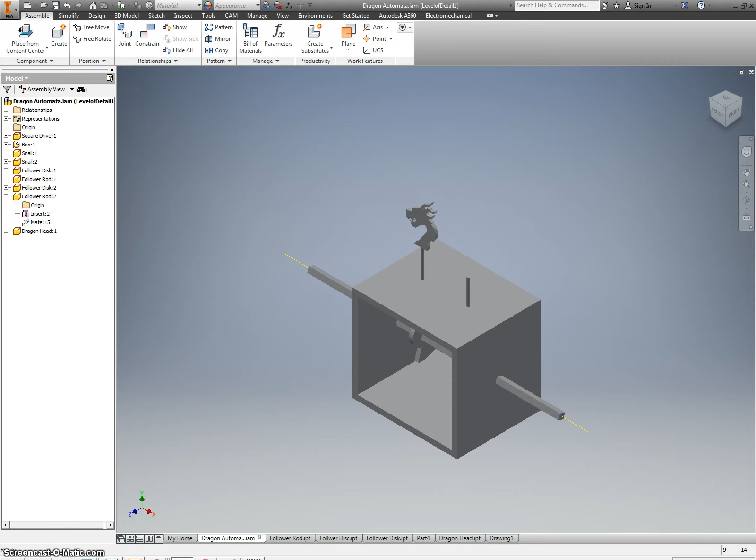Now that you have your cams and your axle in here, your follower rods, and something to go up on top of it to show movement, it's time to do the most important part of the project, worth the most points. Go up to New. We have to make drawings. We have to be able to show other people how to do the stuff you did.

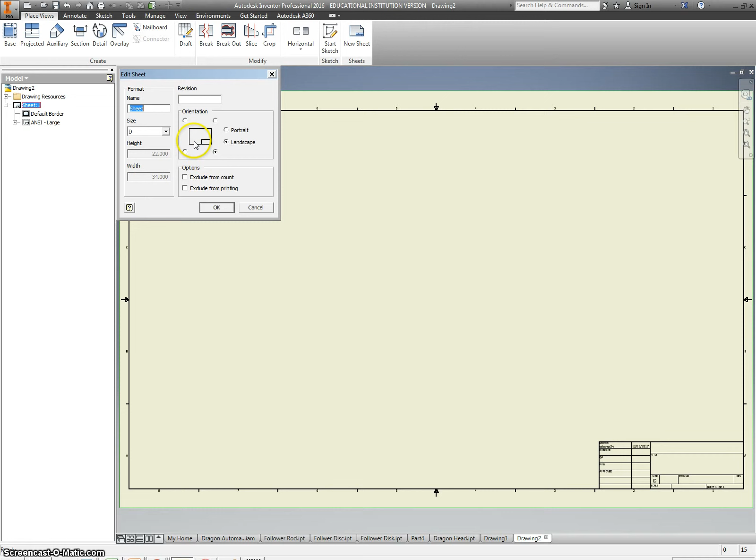First off, this paper's the wrong size. Right-click Sheet 1, go down to Edit Sheet, change your size to A, and say OK. Now the sheet is the correct size, but this title block is wrong. So right-click and delete ANSI large. Hit the plus sign next to Drawing Resources, go to Title Blocks, ANSI A, double-click. Okay, now this is the right size paper with the right size title block.

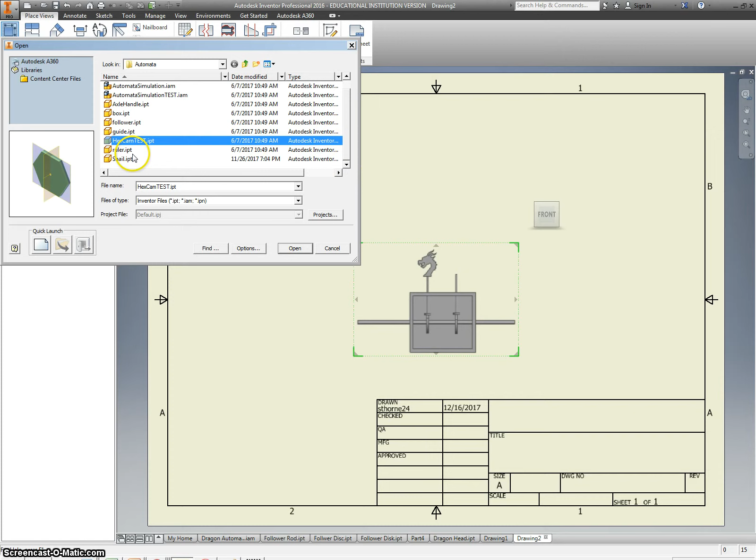We're going to go to Base, and let's search for each one of your parts that we used in here. Some of mine are in different folders, so you'll have to forgive me while I figure out where things go.

When you're dimensioning, you want your front view to be in the bottom left corner, and the other views are going to be -- if it's a uniform thickness, like all of these parts are that we cut out with the laser, you only need 2 views. You want this bottom left corner to have the most detail.

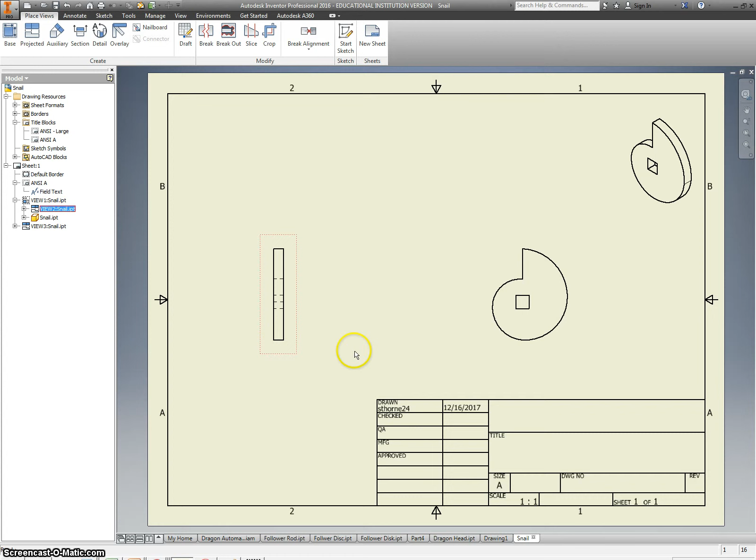So for example, this is wrong. This is the front view, this is the side view, this is the one that should be in this corner here. You want these kind of close together, and then we're going to go to Annotate Dimension, and we're going to start putting numbers on this.

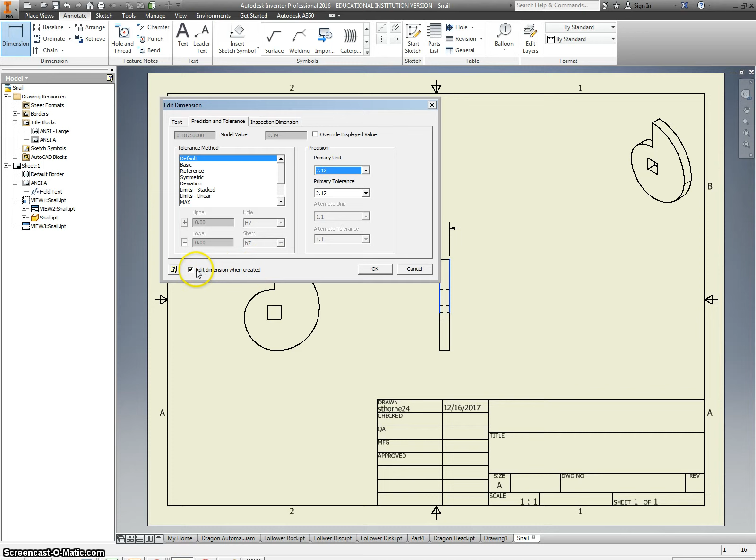Now notice this is 0.1875, but it's only showing 0.19. That's because it only goes out to 2 primary units. Now I could go through and change this each and every single time, or I could uncheck this box, say OK, and then right-click on this dimension, go to Edit Dimension Style, and for every part that I go to dimension in this whole project, I'm going to change my precision to 4. Say Done, and Save Edits, and there's the 0.1875.

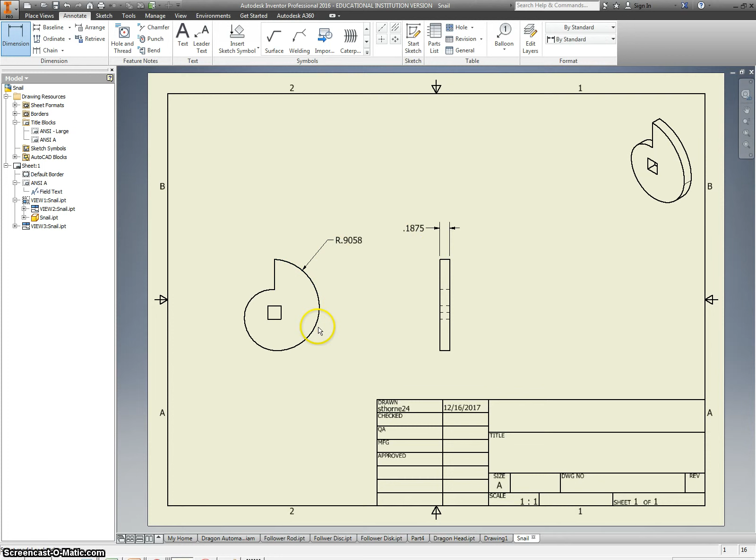This one is going to have different radii for different parts of it. Did you notice how I clicked that little green button and nothing happened? That's because I clicked a center point and it's expecting me to click some other point, which I don't really want to do. So if you hit D on your keyboard, that stands for dimension, and that will let you go and start over.

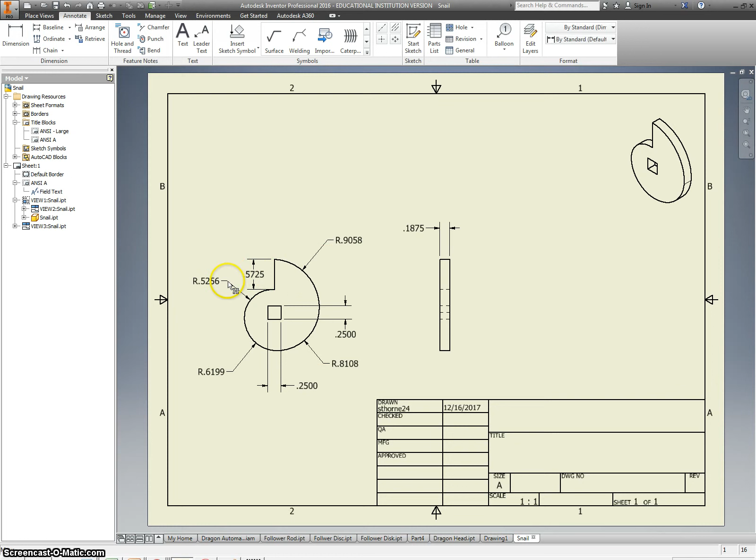Okay, we want to make sure we don't cross any lines, and that we stay inside our page borders. We don't want to go through our title block. We want most of our dimensions to be between these two. But with radii, it's okay if it's off.

We can put in, if I click this, centerline bisector. So if I click these 2 lines, it'll make a line in between. Click these 2 lines, it'll make a line in between. And we can also show that the distance from that point there to that point there is going to be some distance, 1.02. Looks like I'm going to have to go through another dimension to put this one down.

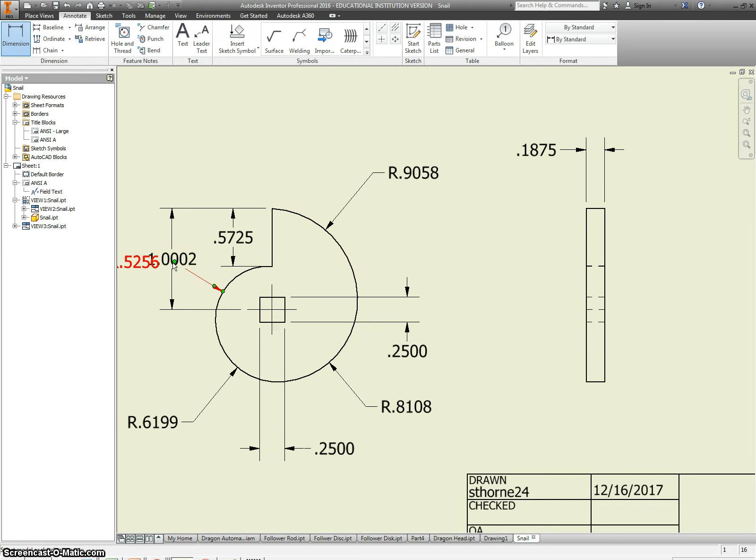So I'm just going to grab this one and move it down just a little bit. Okay, so this looks like a good way to dimension my snail cam. I'm going to double click this one, make it shaded, and keep on going.

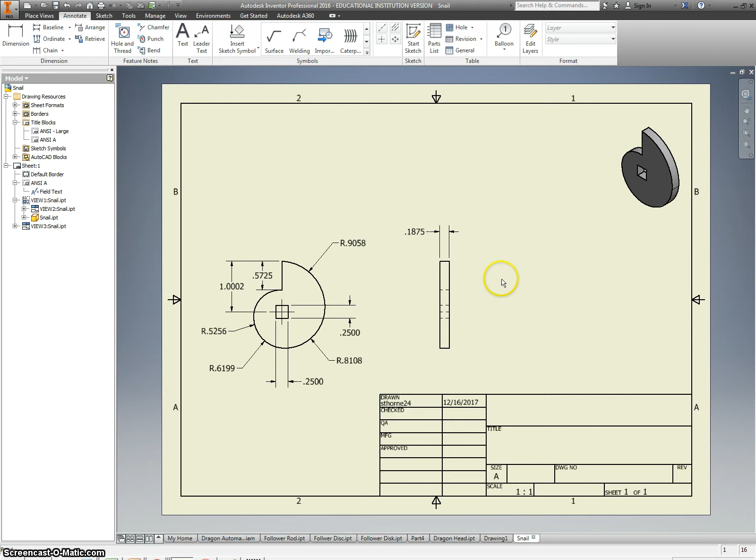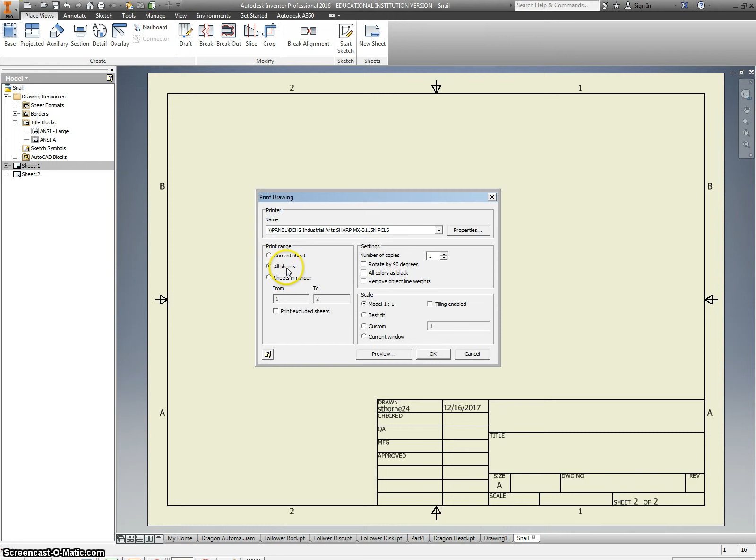Now to add a new page on this, I have to go to Place Views, New Sheet. Don't start a whole new drawing file every single time. This has all your Sheet 1, this is all your Sheet 2, and when you finish, you go up to File, Print, and if you have the right printer selected, Industrial Arts, you can click All Sheets, and this will print everything that you've done. So make sure you have Industrial Arts selected.

It's also good to go into Properties and check Two-Sided. So that's when you're ready to print.

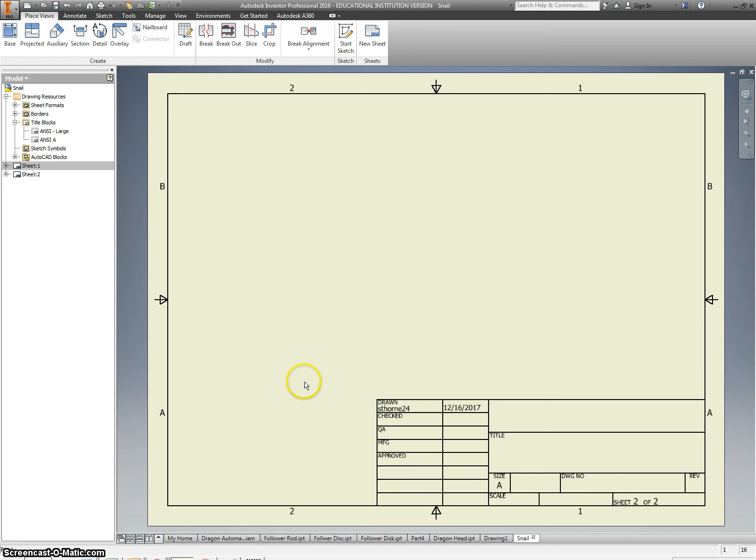Okay, each part that you made for this object, for this automata project, needs to have its own sheet. The only exceptions are going to be like the dragon head, which I can still place on here, go to Base, and I would grab my dragon head, and I would still give this a good size, so it's taking up a little bit more of the paper.

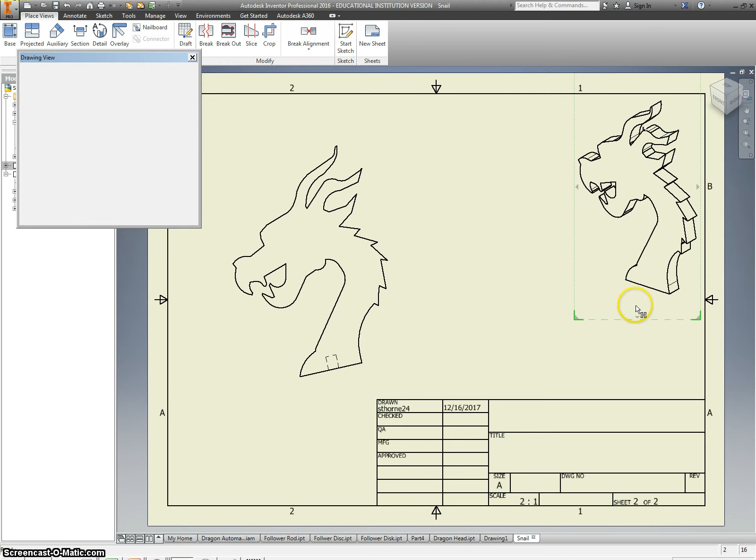Drop it over there, make this guy shaded. This might be one that I want to show projected from this. Looks like projected is not going to give me what I want with that hole diameter.

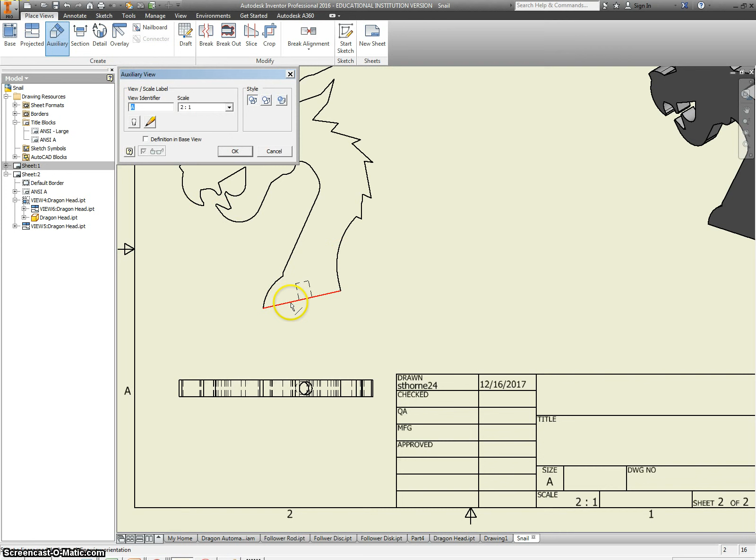Maybe I can do an auxiliary. So if things are at an angle, we can say, hey, that angle, I want to see this lined up with it, which is exactly what I wanted, so that's good. Just click and delete that one. Scroll this down just a little. This one can go up just a little.

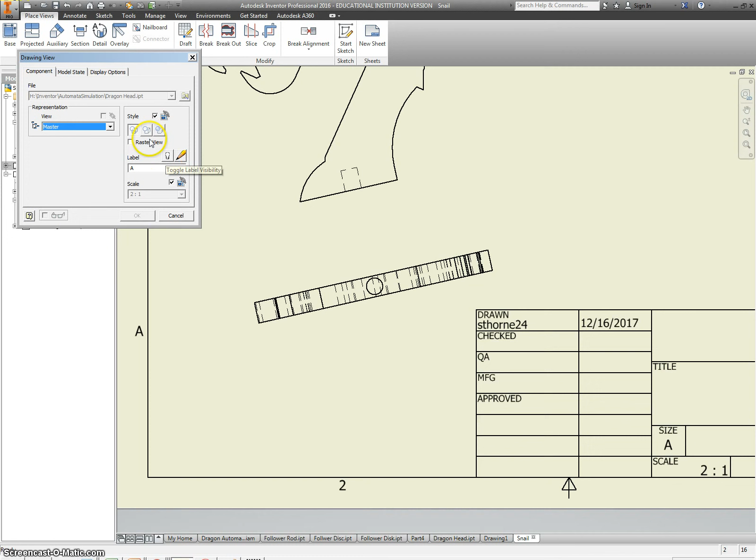And let's turn off the hidden lines. I don't think I can without taking that out, and I like having that. So that's okay. I just want to give this a hole and thread note because it is a hole. And it says what the diameter is and how far down it's drilled.

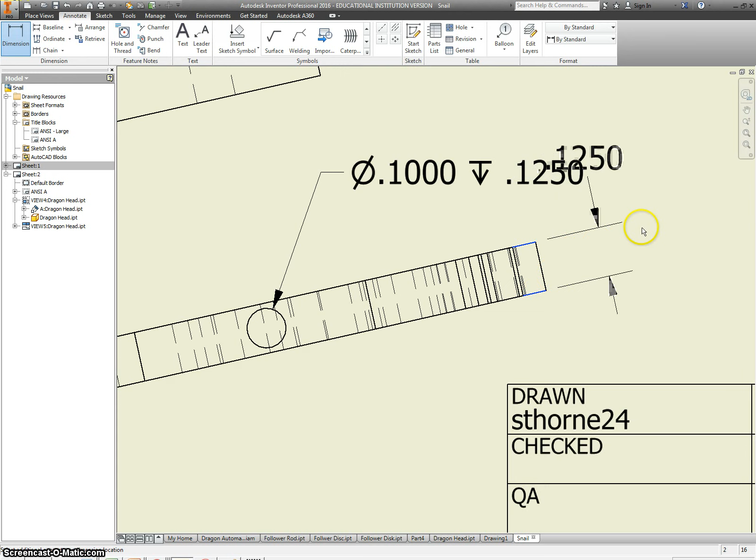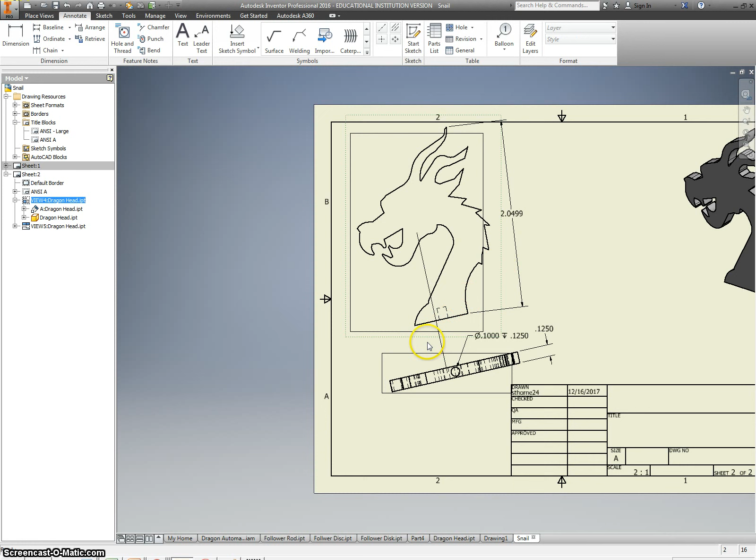Okay, we can also have the thickness of this whole thing. So if you go from line to line and say this is all 0.125, and this stuff I'm not going to worry about. The only thing you might consider doing is showing the total distance here from top to bottom, and even with that you can change the dimension type to aligned so that it's more consistent with where the base of that is. Okay, so this would give you a good idea of how big the whole thing is.

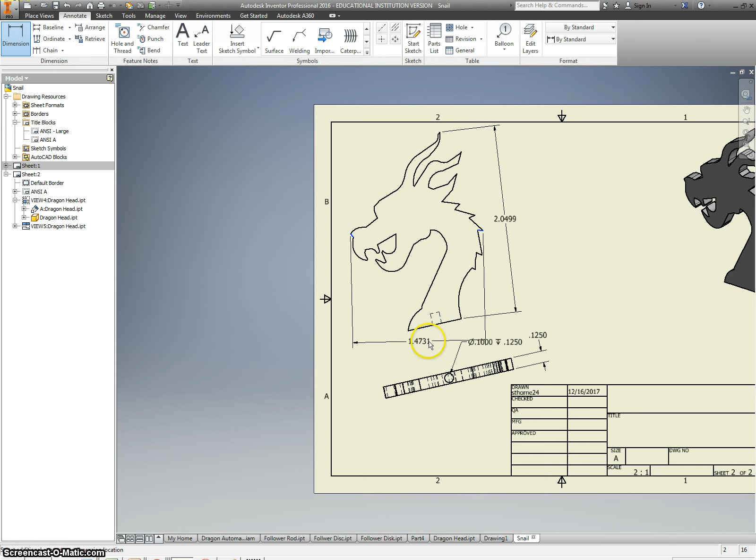You might also pick some point out here to show the total width of it. Another one that you might want to go with an aligned dimension. And that's not doing what I want it to do. So this, I don't need every single dimension on it. The other parts I do.

If you have questions about how to do that and what needs dimensioned, ask. You can always turn it in and make corrections to it after I've marked it up at home as well. Good luck to you. This is the last video that you should need for your project.